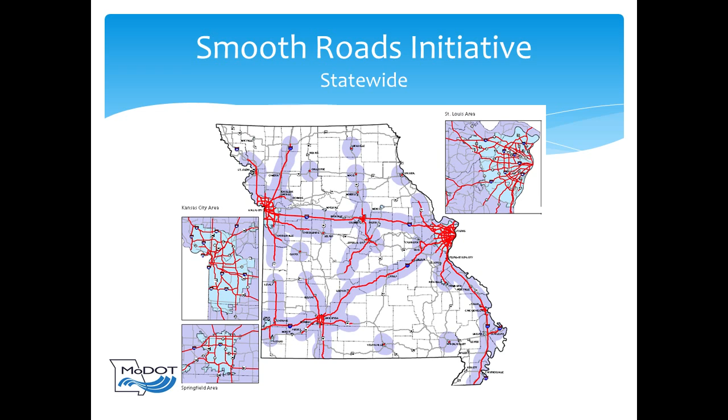So out of that, Smooth Roads Initiative was developed, and you can see the amount of roads that were treated. Interesting fact is 58% of Missourians live within 25 miles of I-70. So I think with this plan, say 85% of Missourians were going to have a road within 25 miles treated, which was pretty incredible. I think it was over 2,000 miles of majors and interstates that were treated.

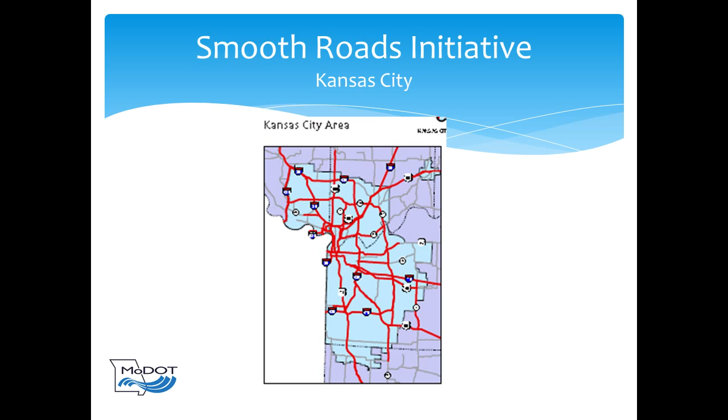Here you can see the Kansas City area, the amount of roads that were treated, all in red. It was a really great product, and as the other graph showed, in 2007, 2010, that's when it exploded and we got up to close to 85%. Now our goal for major routes is to maintain 85%. So now we are in a pavement preservation mode, and our pavement specialist, Tricia Sen, is responsible for knowing which roads to treat when, and to maintain what we've got. Before it was worst first. Now we have to strategically plan out what we're going to do.

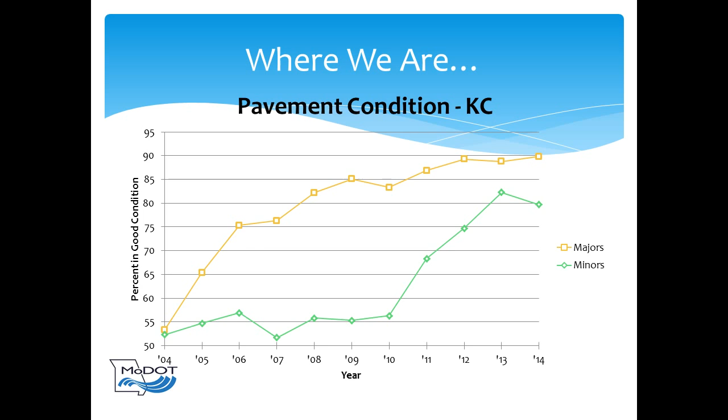You can see we focused on the majors, so the minors continued to stay at the 50s. In 2009 or 2010, we really focused on the minors, and our goal was to get those up to 70%. And in Kansas City, we got up to close to 80%. So if we were still in bad shape, I wouldn't be showing you this graph, but since it looks so good, I showed it twice.

So how will we maintain this? Kind of echo Mike Ross. We're going to keep good roads good. So it all comes down to knowing your roads, having a great plan. You know when they were last paved, what they look like now, and how much more life they have left in them.

This is kind of outside of pavement preservation, but just to talk about how projects are developed and when projects are put into cycle. Project identification, this is where Tricia identifies which routes are next on the list, and this may be 4 years in advance, so her crystal ball is really brightened up.

She shines them up real bright, because 4 years in advance, you may have an asphalt that's only down 3 years. So you're assuming that we have a 7-year average pavement life. So you're assuming that in year 7, you're going to need to resurface again, which is not always true. It may be year 5, it may be year 10, but we have to go off something. So we go off 7 years.

Then we take that to scoping estimating. That's where all our maintenance field comes together. That's where construction, design, all the people that need to know come together, traffic, and you have a paving job and then it just comes into a traffic and guardrail and everything that everybody wants into one job.

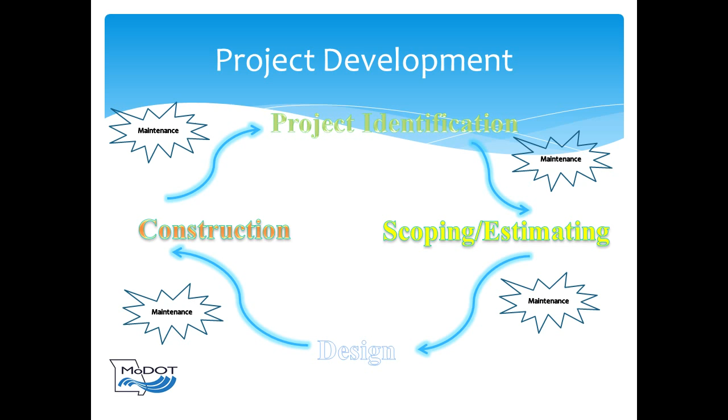Then you take it to design, they make up the plans, then it's constructed. And then as a maintenance guy, I have to say that preventive maintenance is done all along the way. So whether that's a pothole that pops up in the wintertime because you didn't get enough pavement repair down when it was constructed, just maintenance done all along the way.

Statewide distribution, this is money that comes from gas tax and sales tax on new vehicles. This is typically used for interstates and major routes. This is work performed by contractors, consists of mill and fills and overlays. And these are the projects that need to be planned 3 and 4 years in advance due to the scoping, estimating, design, and all that process.

Then we have an operating budget, where this really came into play when we started focusing on the minor routes. We would spend half of our maintenance budget on buying materials for minor routes. So our maintenance crews perform cold mix overlays, chip seals, things of that nature, fly coats.

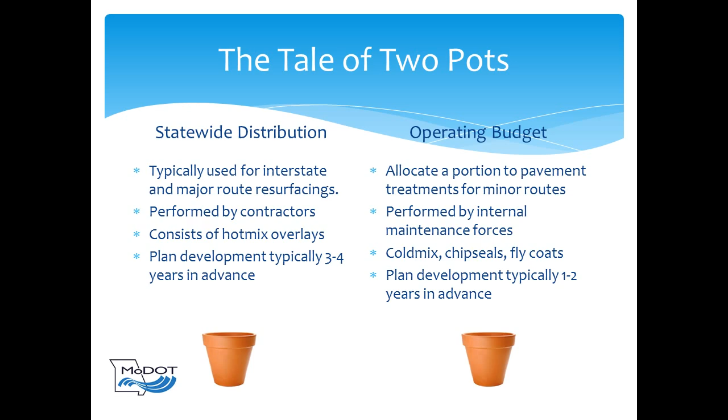This plan development doesn't have to take place as far in advance. It's 1 to 2 years in advance, which makes it a lot easier to put the right money on the right road because you can see where it's going to be in a year or two. As I mentioned, we have an average 7-year pavement life. Scoping needs to begin 4 years in advance for interstates, 3 years for majors, and 1 to 2 years for other routes.

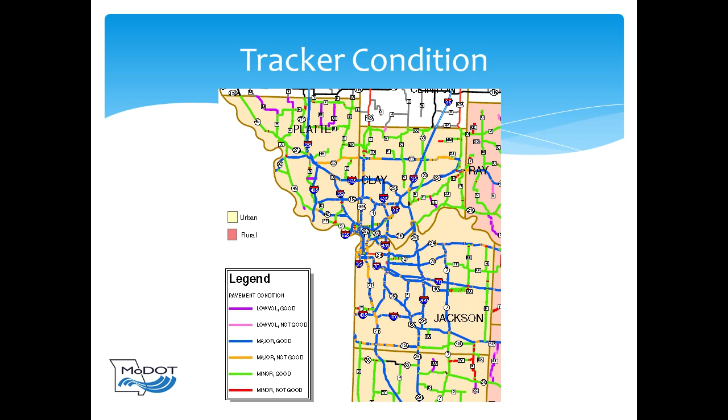Date collected. We usually run the routes in the late fall to try and catch all the resurfacing projects for the next year, for when we make a map and get our percent good and percent not good. But there are some routes that are paved in November that are run in October, and so you miss that. It measures the grade, lat and long.

But the two most important are IRI and visual pavement condition. These are how we determine good, not good. We have a set of criteria based on inches per mile to determine if a road is good or not good, and that's how we come up with our tracker map.

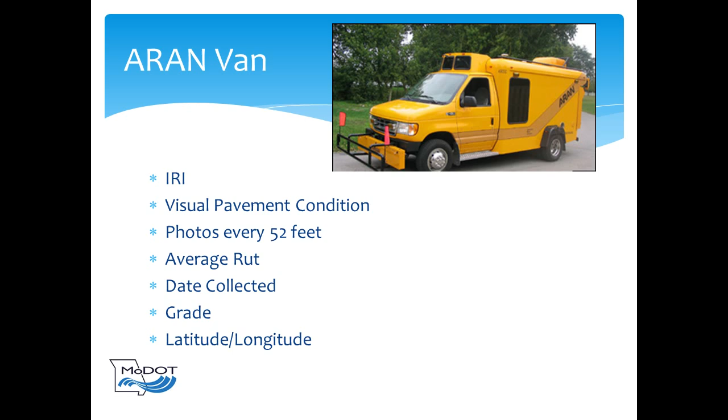Some other factors that go into route prioritization is maintenance field input. We need to know where they're spending a lot of their time and money, because if a crew has to go out multiple times to a job, that's money, and that's also them being out in traffic, which is unsafe. And if that's a high priority for them, then it should be a high priority for us.

The IRI, as I mentioned, visual pavement condition, pavement life remaining. So if we have 7 years average pavement life and it's 5 years old, it should already be in the process of being scoped and estimated. And then our percent good and our average daily traffic. So obviously we want to affect the most people that we can, so the higher volume routes take priority over Route AA in Johnson County, Missouri, not Kansas.

How we got there, talk about a few of our pavement treatments.

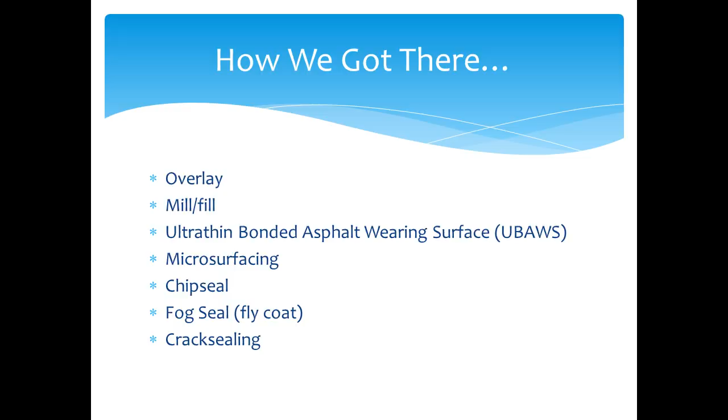These are some of the methods of how we maintain what we've got depending on what the current conditions of the road are. Overlay or mill and fill with SuperPave. This is really majors and interstates. We don't put this down on minor routes. You can see there $78,000 per lane mile is how much it costs. That's before you add in guardrail, pavement repair, all the wants of everybody.

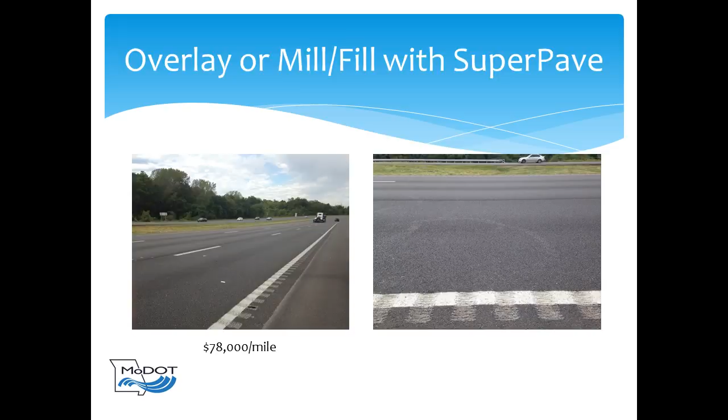And we have UBAWS, a bonded wearing surface. This is about 3/4 inch thick. I think Mike already explained it pretty well, but it just drains water away from the pavement, and it's just a super duty chip seal for interstates and major routes. We've had great success with UBAWS.

Back in the early 2000s, mid-2000s, we started to use it, and it was kind of a new thing, and it was all virgin aggregate, all virgin oil, super duper. Well, you pay super duper price for it, so the pendulum swings down to the middle, and we try and cheapen the price. Well, we finally reached the other end, and we've had a few UBAWSs that haven't been so successful. So the pendulum's kind of swinging back. So just like with any new treatment, you start out top notch, and then you've got to find out where the bottom is before you can find the middle.

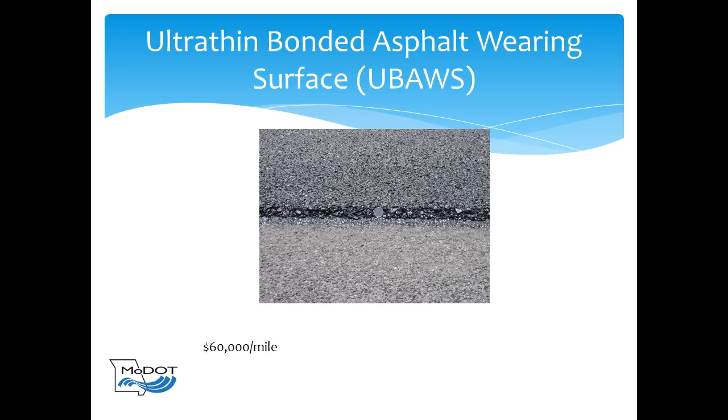The microsurfacing, we used to do a lot more of this in Kansas City, but this is a bridge that we just recently did it on to improve the friction. We had a few wet weather incidents, so this is really a great friction increasing project. But we don't do a lot of it in the city because it has to be done during the day, and it's got to break quickly. And often we have a lot of traffic in the day, and we can't do it at night, so it's not really an option in a lot of places.

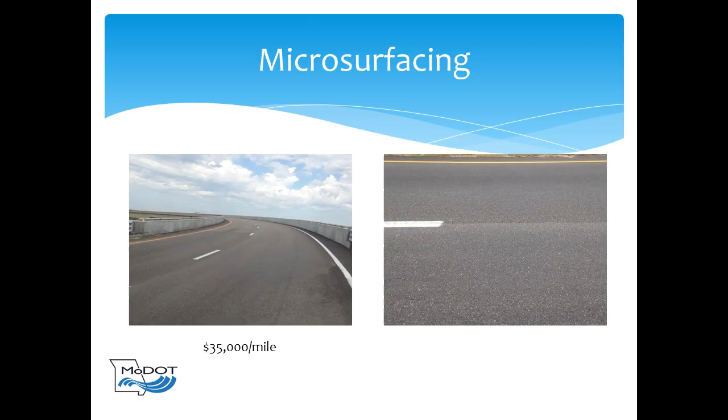Crack sealing, this is a project that maintenance folks do. Pretty self-explanatory. Coldmix overlays, this is getting into some of the minor route pavement treatments. This is a great treatment for routes less than maybe 600, 700 ADT. We'll go in, and our crews can lay it for about $34,000 per mile, and then we go through and put a light chip seal on it. And then a couple of years after that, we come back and do a full chip seal. Just give that material enough time to cure and get set up.

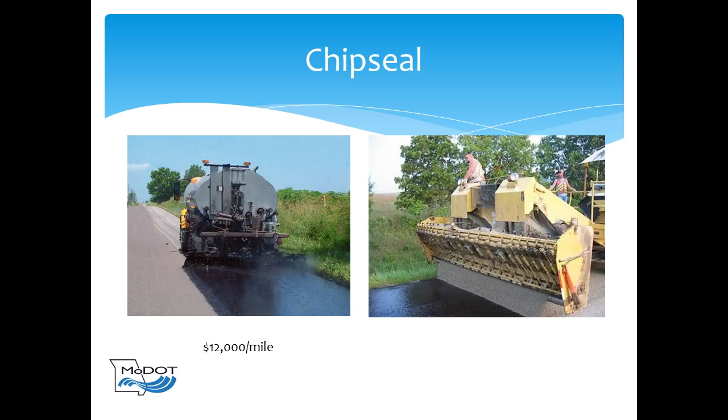And then a chip seal, our crews perform this for about $12,000 per lane mile. And we've found that we have comparable results for less price than what the contractors can do it for. So this is something our maintenance field kind of takes pride in. So we come up with a chip seal plan every year and we'll let them go at it.

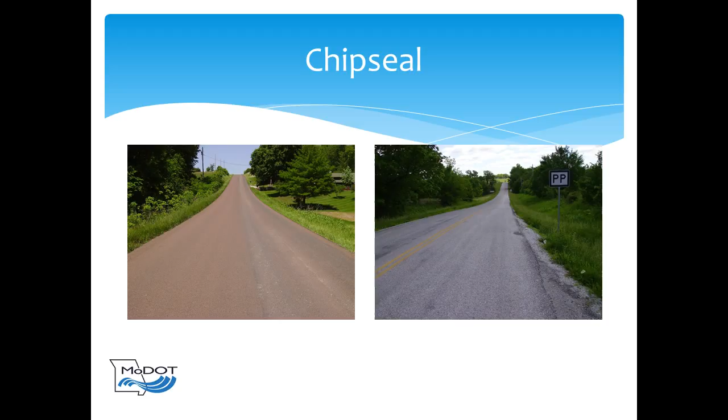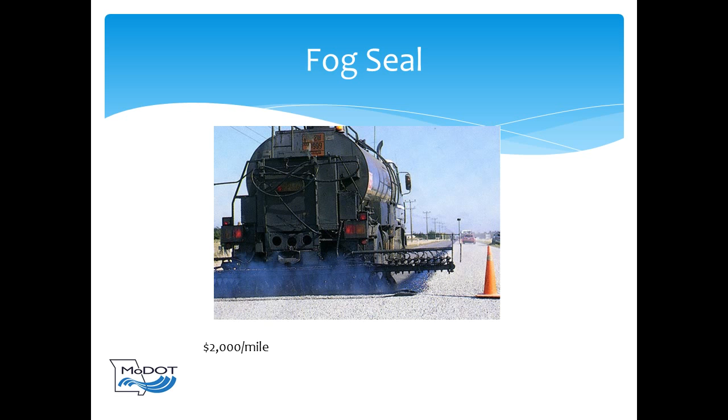These are a few pictures. We use haydite on the left and limestone on the right. Haydite's used for higher volume routes just because we have less windshield claims, and people don't think you're turning their road to gravel if you don't use limestone. Fog seal, it's just spraying some oil down to reduce the oxidation on the pavement.

We also have a few innovations. 2 years ago, we tried a Kraton Polymer. Polymer modified tack's pretty much a necessity for most overlays and mill and fills. We use RAS and RAP in a lot of our mixes. And then we also had a surface sealing product called Onyx that we tried, and we've had success.

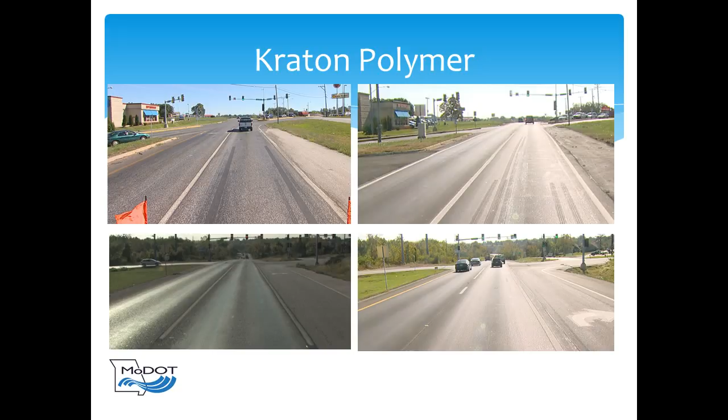And I don't want to speak incorrectly. Somebody correct me if I'm wrong, but Kraton Polymer is a polymer that you can add to your mix that you can add a lot more of, and it doesn't make your mix really gum up. So you can add it to a PG 64-22, and it really increases it to 76-22 or above without getting that real gummy. So it gives it the strength and it's still workable.

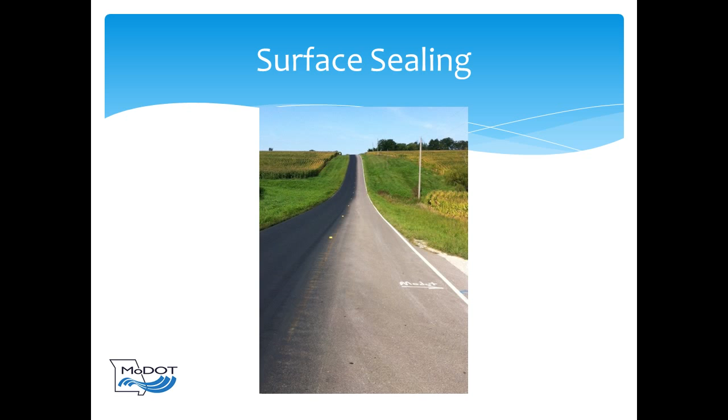This is a picture of the surface sealing, the Onyx product. It's applied just like a flush coat, but it's got real small aggregate in it. It comes out of a modified distributor, I should say. And they can motor down the road at 10, 15 miles an hour, and they're done before you look up. And that's all I've got.

Any questions? Yes, sir. What's a flush coat? A flush coat is just a fog seal, putting a light coat of oil down, usually about 0.05 gallons per square yard or so. And you don't blot it with anything. You just wait for it to break.

The question was, is 7 years the average pavement life? So from the time we put it down, if we put it down in 2015, in 2022 it should need another treatment. Okay, so it's just between treatments. Yeah. All right. Thank you.